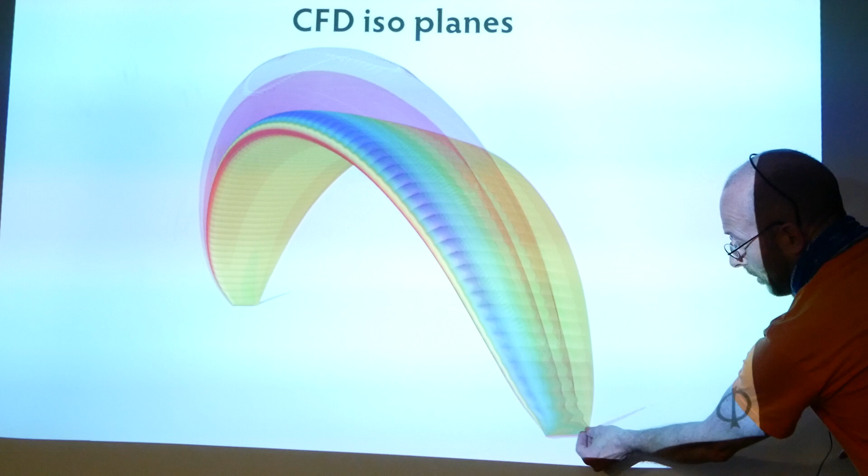So the vortex is finally creating a low pressure area. The low pressure is sucking on our wingtip, is braking our wingtip, which is lowering the performance. We always try to limit, to minimize this effect by having more.

Hi everyone, this is a bit of a different one. I've had the chance to record a talk by Hannes Papesh at our local club here in the UK about wing design. If you haven't heard of Hannes, you probably have heard of his work because he's been flying, designing and building paragliders since the beginning of paragliding really. He's been working at Nova for many years and was the main person responsible for the Mentor series, which you've probably seen some Nova Mentors around anywhere you fly. And recently he's also started his own company, Phi Paragliders. So some really interesting design concepts, an interesting design process, and talks about paraglider design, and especially in-depth paraglider design, are very few and far between. So I hope you enjoy it if you're a design geek like me.

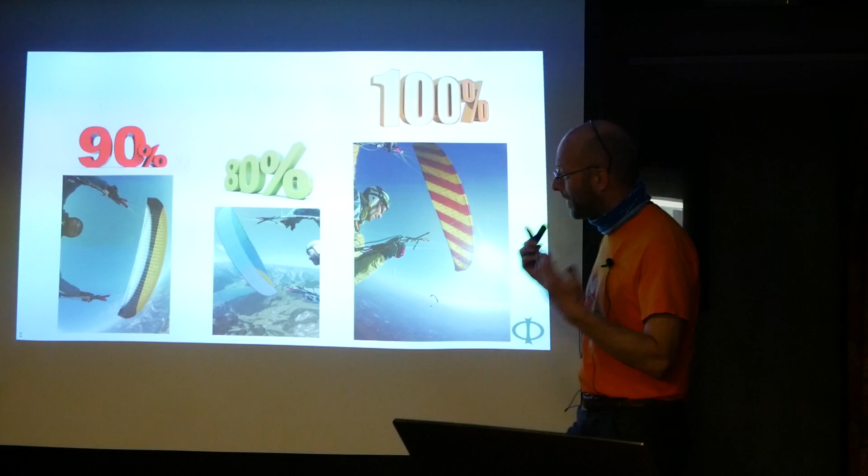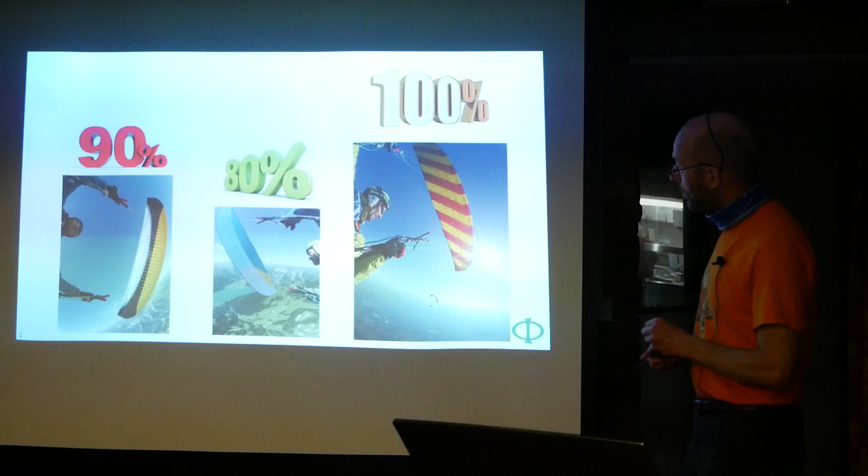And then I have the challenge to just combine the good point from this one with all the good points from that one to reach one glider which is good in all the matters, which is reaching 100% and which is ready to be certified and to be sold in serial. So these are real prototypes we had in the development of the Symphonia, our high-level A-class wing. And how do we do that?

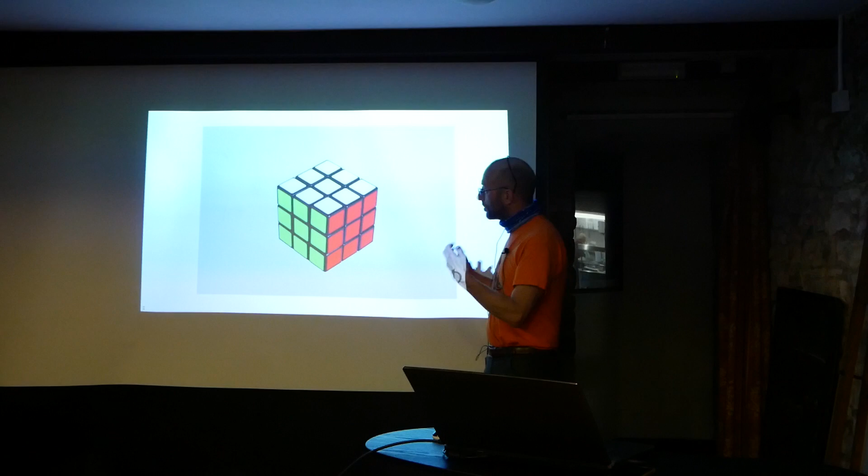Do you know that game? Yeah, I was presenting this Rubik's cube to our dealers meeting in the early days just to demonstrate the difficulties we have in paraglider design. Sometimes you're just finishing the red part and the green part is getting puzzled. So the important thing is just to finish all the aspects of a wing, which is very, very tricky.

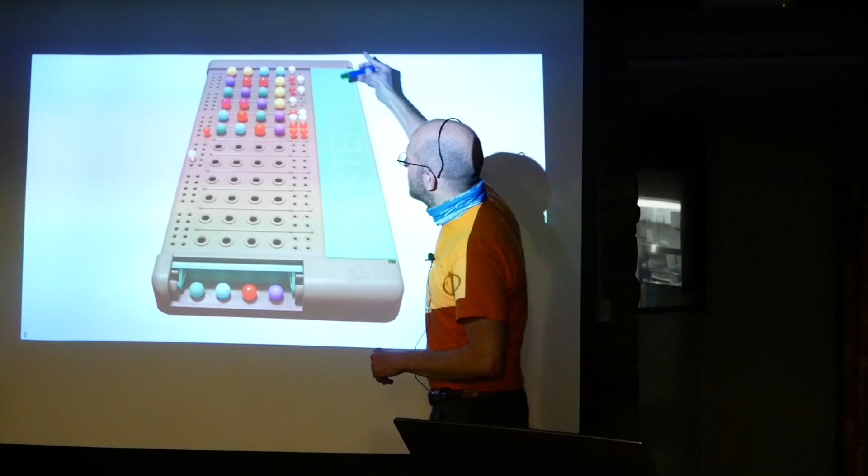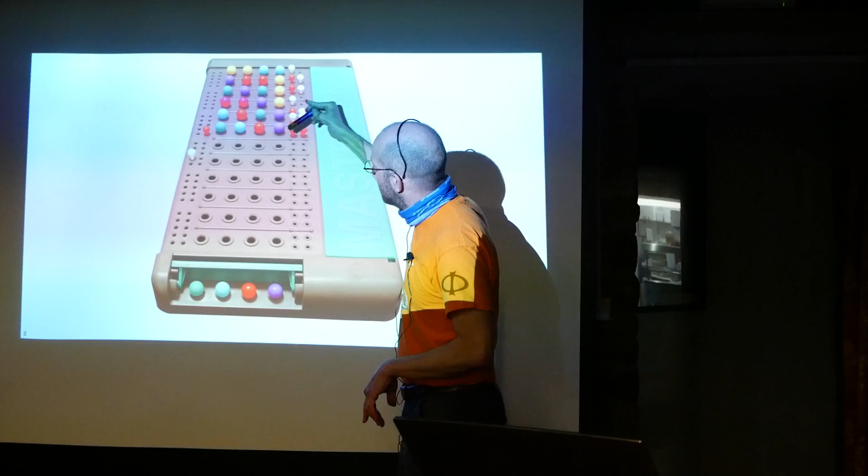Do you know this game? Yeah, it was quite a trend in the 80s. When you're the one on this side of the table, you have to guess the color code, and that one is just giving the color code and is giving the answers, if it has the colors in the right position or the right colors in a different position.

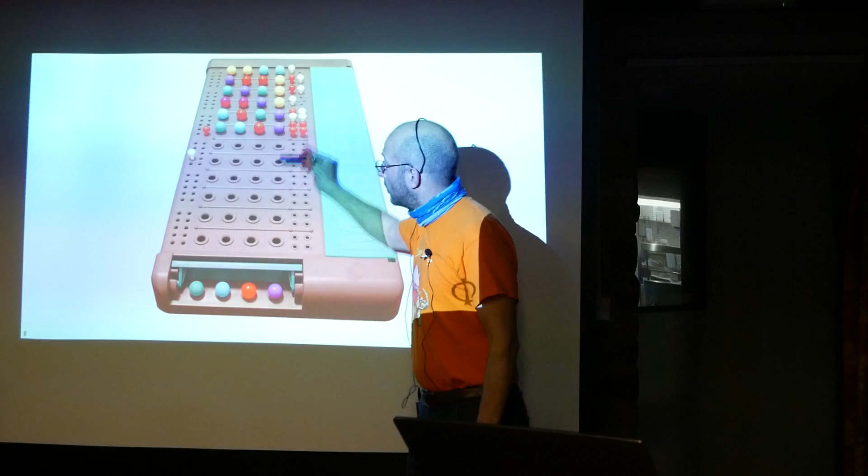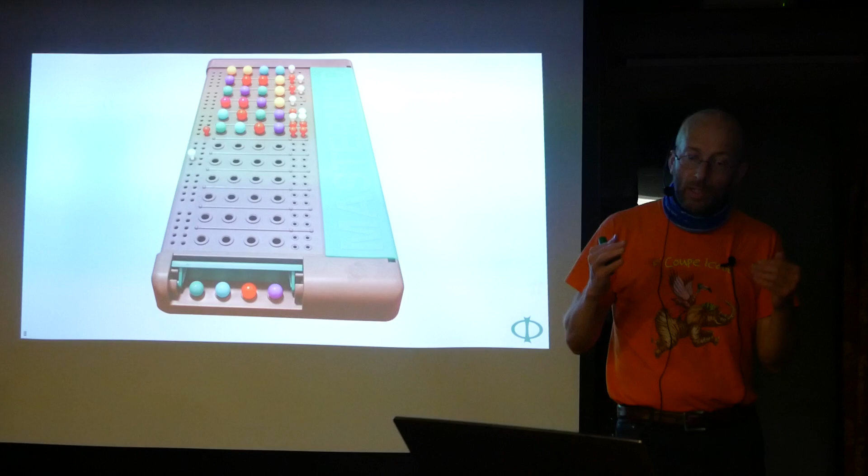And if you're really acting systematically, you will always get the right code among these tries. You will never fail. You just have to keep on acting on the base of a very clear strategy. So the strategy is the very, very important point in development. Sometimes, especially the last steps are the most difficult ones.

But I had the experience with my junior designers, like Alex, who is designing for Skywalk now, or the Advance guys, or Philip designing for Nova, that they have some problems doing the last step, the final changes for the certification and the final steps that are necessary to have the glider perfect and to have it finished and certified. Some of those had the tendency to jump over the fence and run an extra round. It's a matter of mental strength to be able to finish something.

Remember tennis, like Roger Federer, he's used to win. He won more than 100 big tournaments already, and you see now he's still winning, even if his competitors are much younger, maybe playing much more physical tennis and have some more abilities, but they don't have this mental strength. So it's also a matter of experience and strength to do the right last steps.

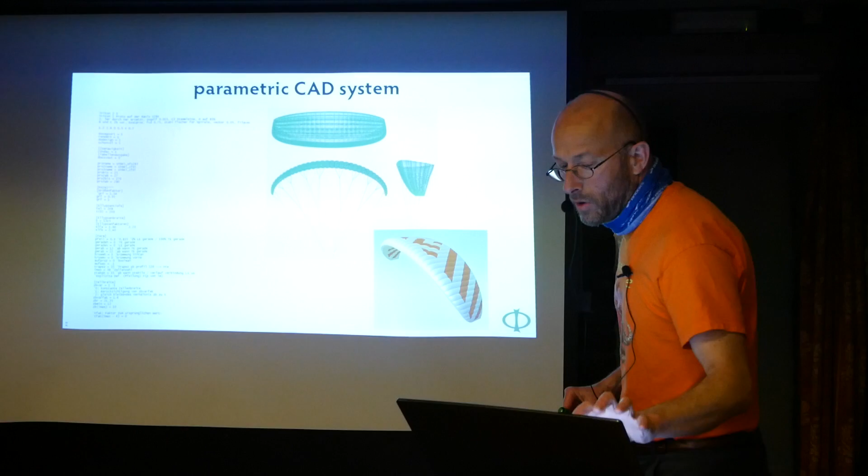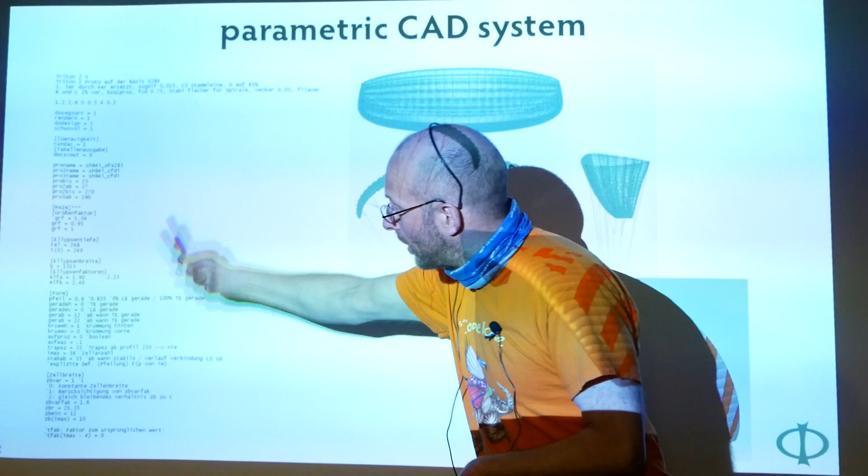Compared to biology, our development system is a parametric CAD system, computer-aided design system. That means every single entity of the glider is coded, defined by parameters. You don't do anything with the mouse, like on Glider Plan. Today I remember Glider Plan. I always forget the name of this Australian standard software. With Glider Plan you can do everything, but you have to do everything with the mouse, and when you do something with the mouse you do it every time different.

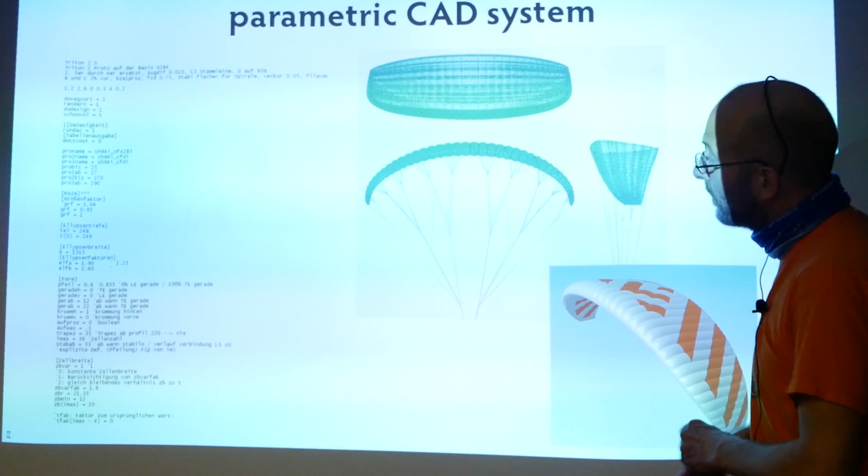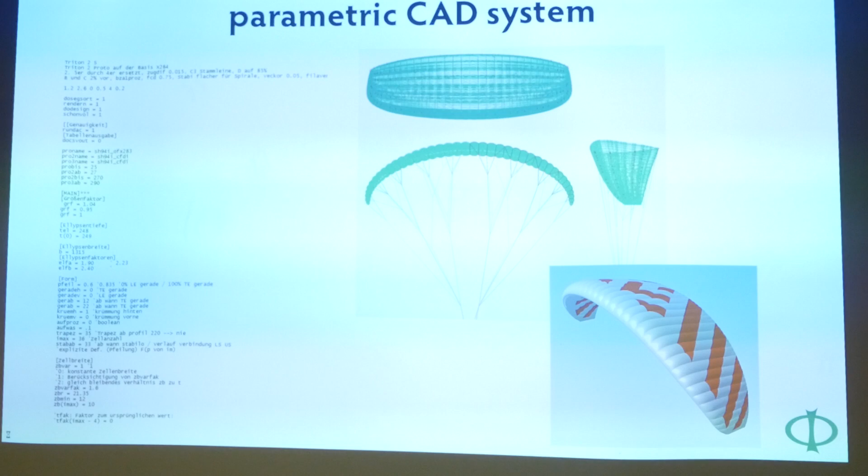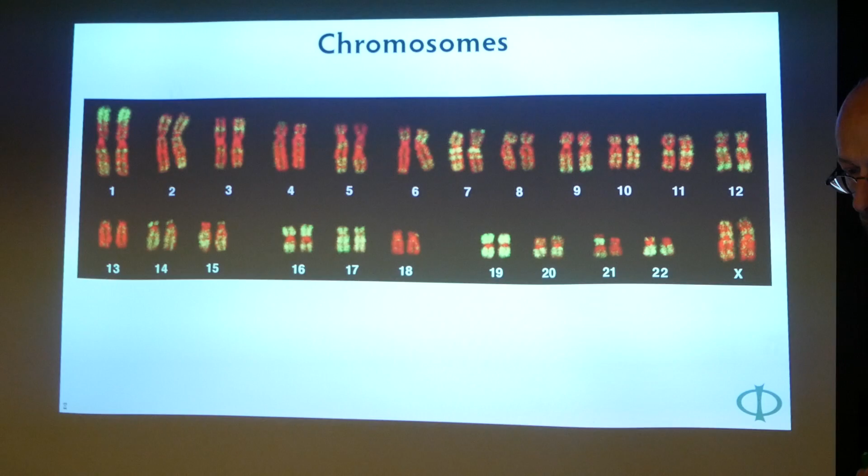When you have it coded in parameters, it's fixed and clear, so nothing with the mouse but some dry code, just parameters. Every single curve, shape, whatever is defined by a parameter, compared to our biological relation where everything is coded by the DNA and by reproduction of the single cell. The DNA, which is a long molecule, normally is folded together, is bundled together to chromosomes, and similar to that, we can bundle some technical features to just a group of parameters.

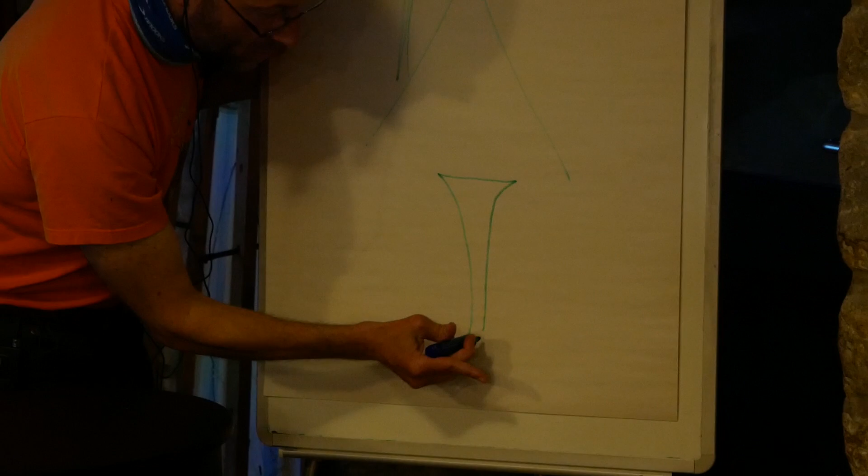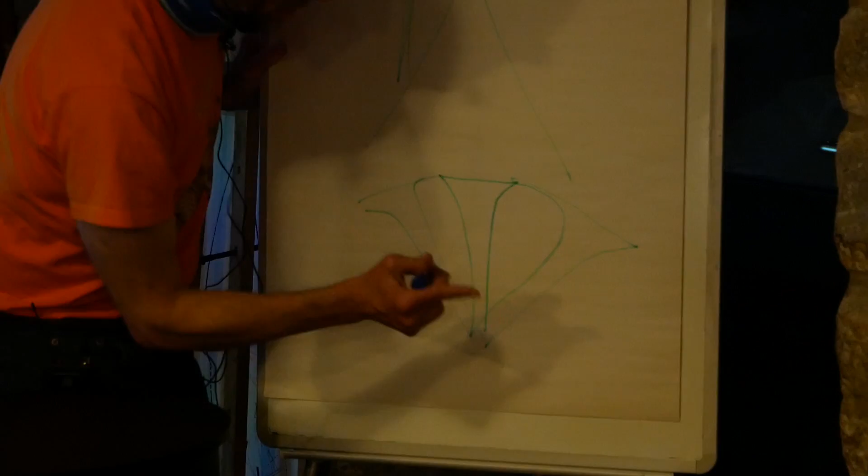Like this may be the code defining the new type of diagonals. You know, these fingers I was designing for the Omega XX in 2015 the first time. So they're shaped like that, like trumpets. And we just had a prototype, some development to optimize these parameters, to form these fingers. And then it shaped maybe a chromosome, and we can take this chromosome and apply it to the other prototype, and it will work among very few tries, maybe one or two prototype generations.

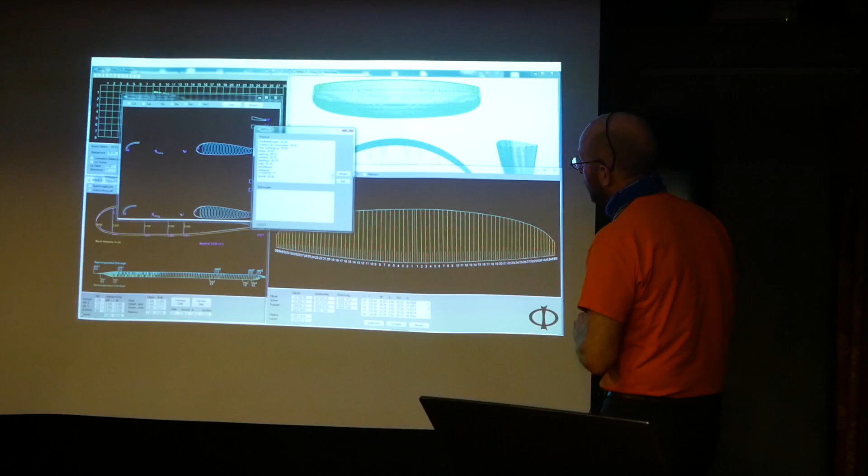So we are just recombining successful strategies. It's like a brick game. That was the base of our effective work. So we could certify 31 gliders in 1 year and 6 months, only because of this possibility to have these bricks recombined. Here we have a short overview of the single screens of the paraglider development system.

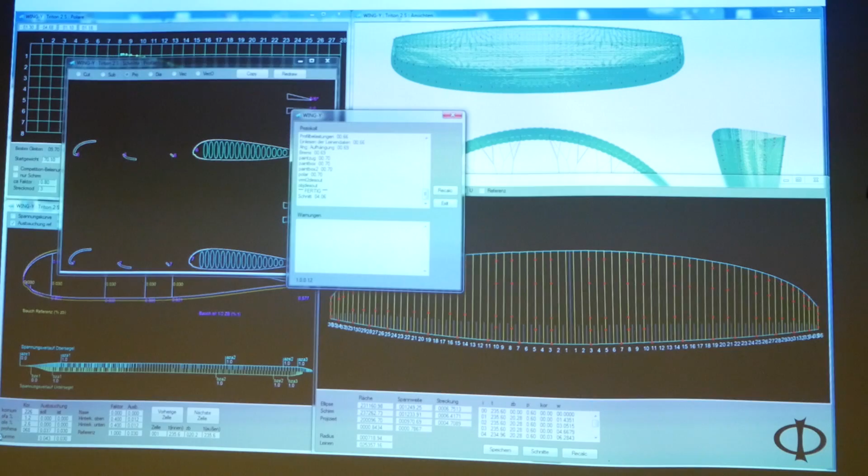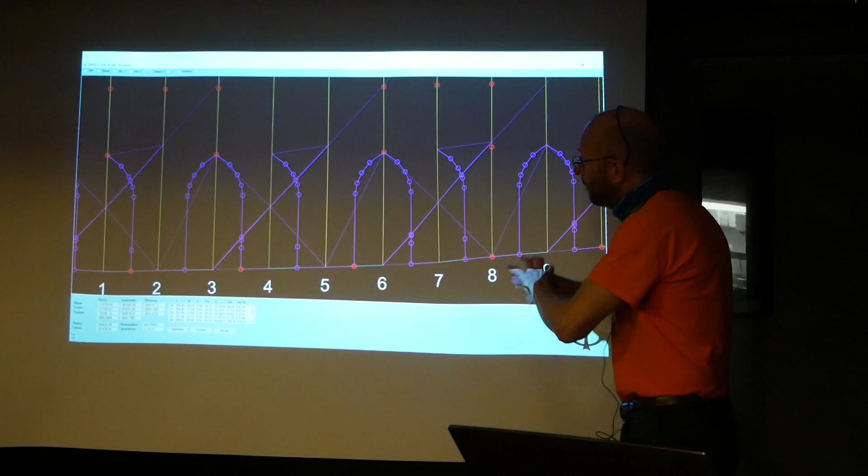We have here the ground shape, we have the views, we have the log file, the patterns, the ballooning transitions. We have a very simple performance prediction, just a simple one. We're getting more into the detail. These are just the sail cuts describing the design and having the inside mini ribs on the trailing edge with all the technical data. Here's some more details of the sail cuts. I was myself developing this software since 1988. So the first was just a sail cut calculation, but now it's a very complex workflow.

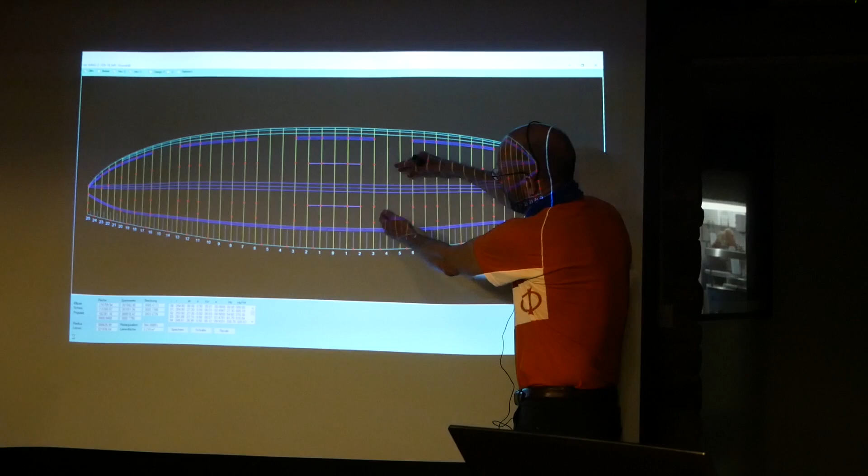These are the straps, for instance. You see the intake and the straps. Here you're playing around with different suspension positions, and you need the straps to keep the areas between the suspension positions stable until a certain amount, but then it should be a weak point.

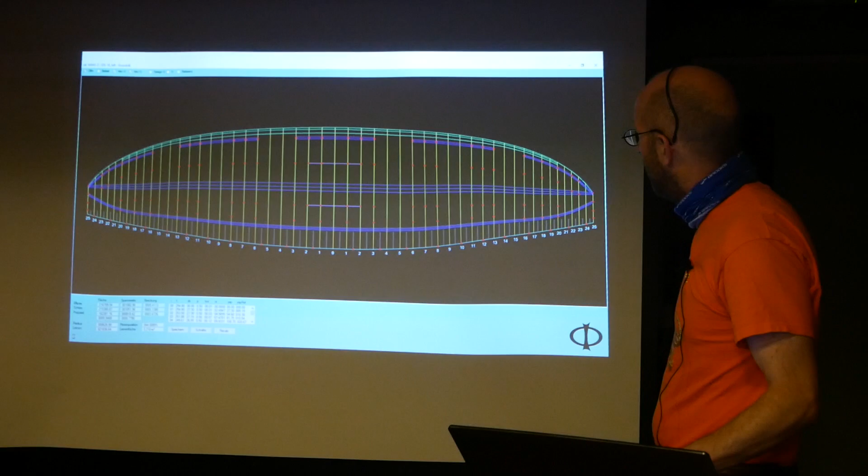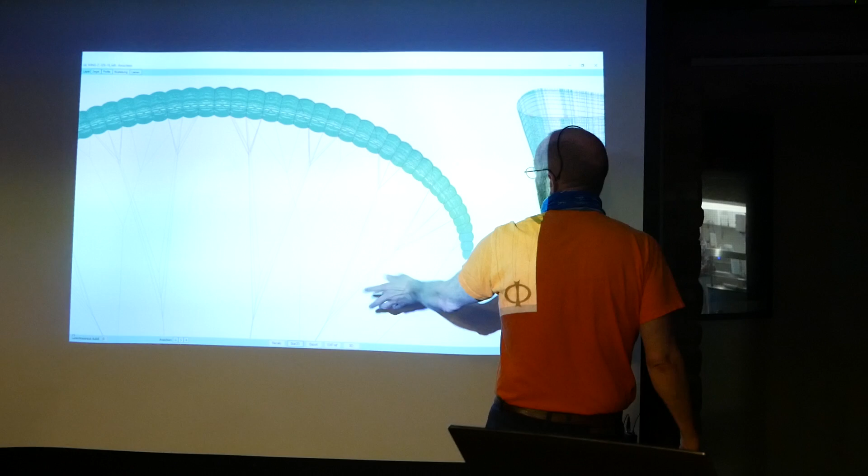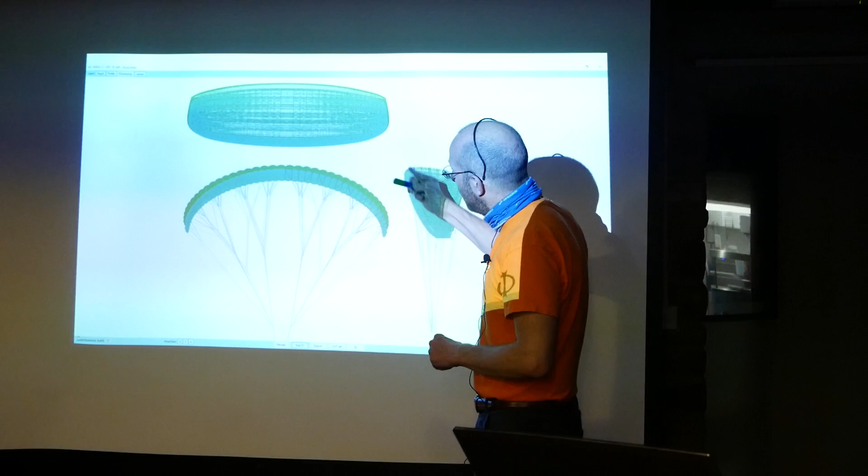Here you see the ballooning of the single cells, you see the diagonals, the angles of the lines, and at this stage there is also a simple analysis implemented, which is calculating the forces and which is giving you some infos about the line lengths and the diagonal angles. But the much more complex analysis will follow later. Most of the time you have a reference wing, here the green one. You can compare every single entity between the new draft and the older reference.

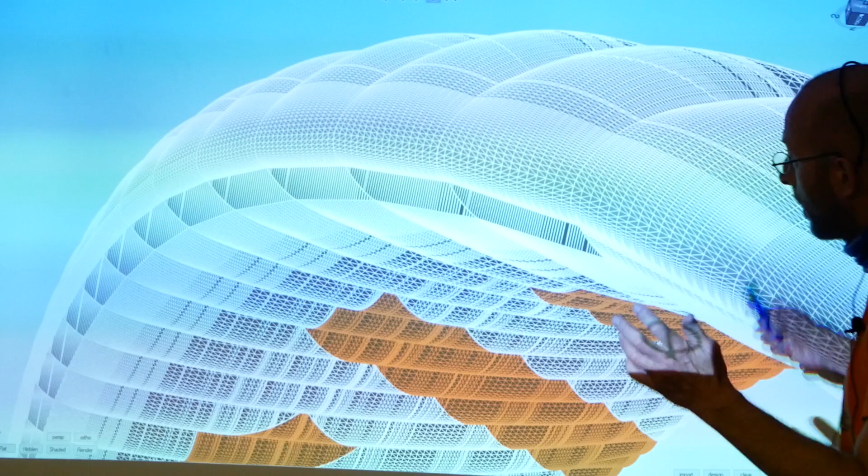And of course you get the nice 3D renderings in different types. Now we come more to the point of analysis. I was internally deciding to split one paraglider cell into 16 single segments, and I have 120, 150 coordinates in profile length, which in combination is creating a very dense surface mesh. And this surface mesh is the base of a simulation mesh.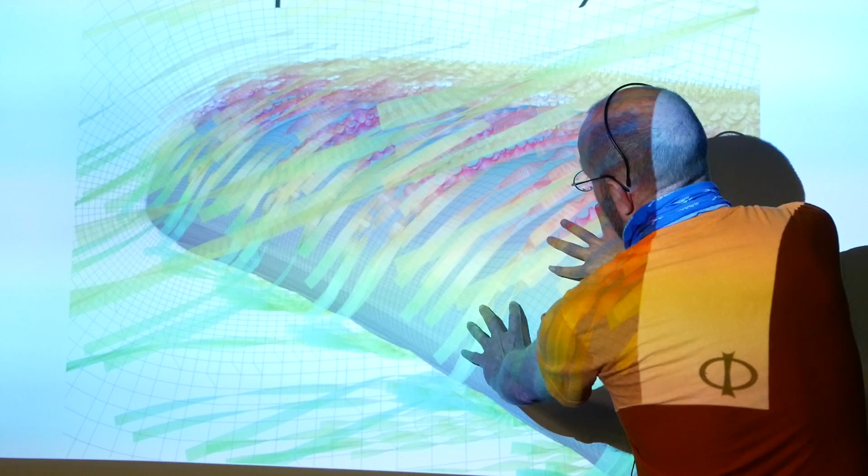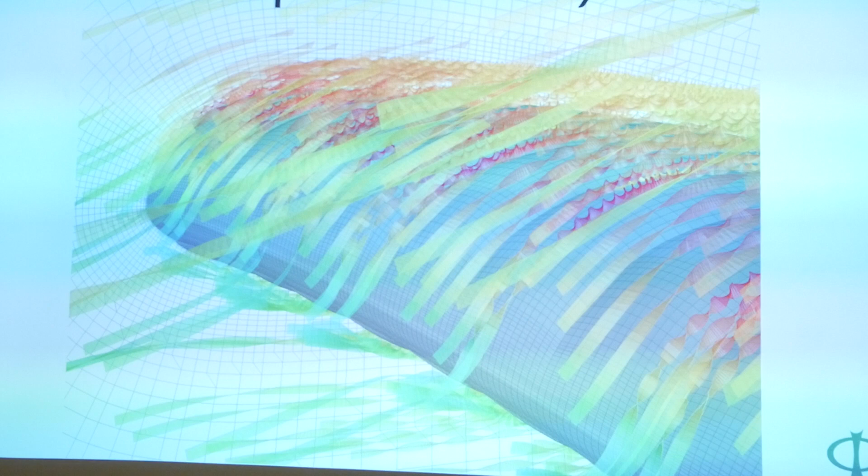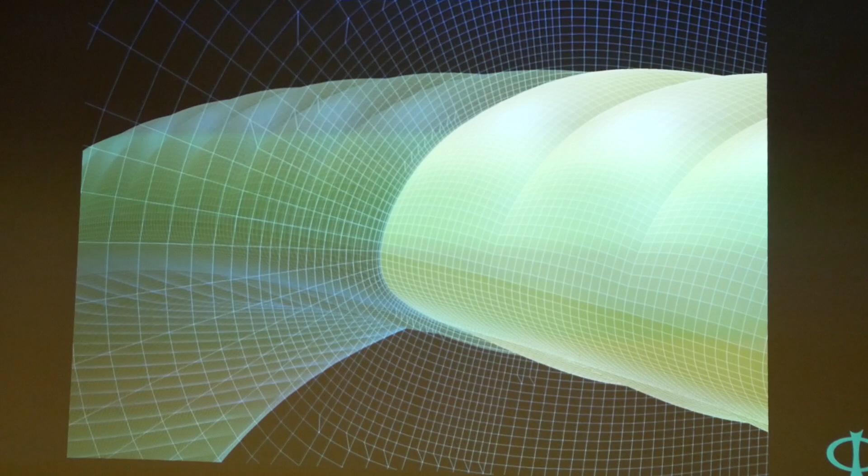Here another picture of the simulation room. So the whole room around the wing is filled with elements. It's called finite volume method. And you can do some nice visualizations. Like here you have the intake. We are simulating inside and outside the wing. That means we can get exact results regarding the pressure inside the wing.

Here you see, for instance, the stagnation point. It's still before the intake. It's depending on the angle of attack, on the more lower side, but still very close to the leading edge. The color is describing the speed. You see here in the area of the stagnation point, the speed is very low, and above the wing the speed is increasing a lot, about 50%, so over 150%, and the higher speed is creating a lower pressure, which is letting us fly.

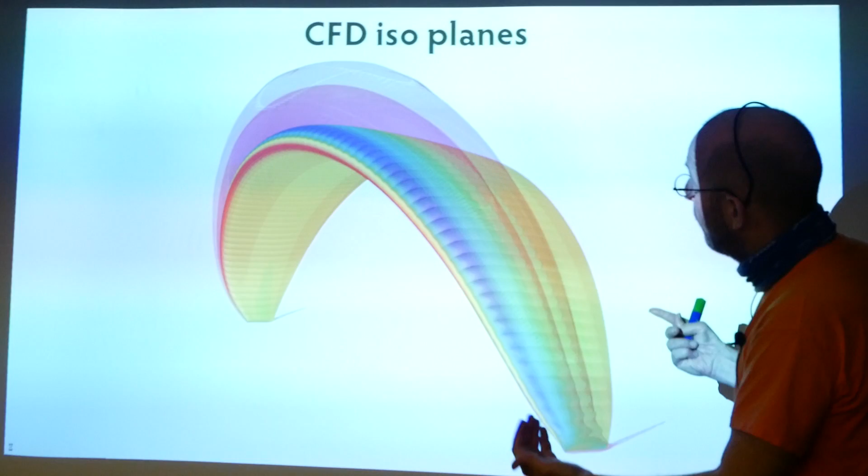Here you have the visualization of the vortex on the wingtips. You have experienced those when you ever crossed the flying path of a bi-place glider, for instance. You feel the energy. The air is just rotated. The lower pressure area, so the higher speed is creating lower pressure. And this lower pressure, we can visualize it like a bubble. So the lower pressure is a bubble sitting on top of our wing, and it's producing the force which is lifting us, or which is keeping us in the air.

I'm sorry? It's a fly bubble. Yeah, it's a fly bubble, yeah. And now we have, I think, talk number 7, and now you just had this idea, so it lasted a while.

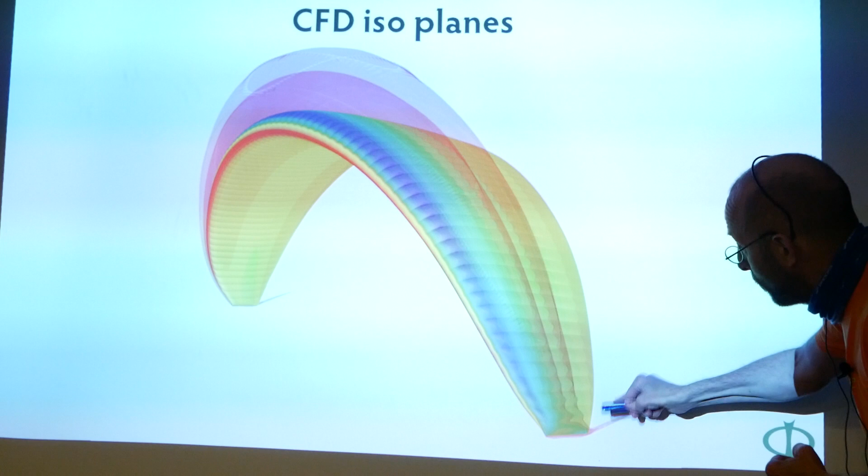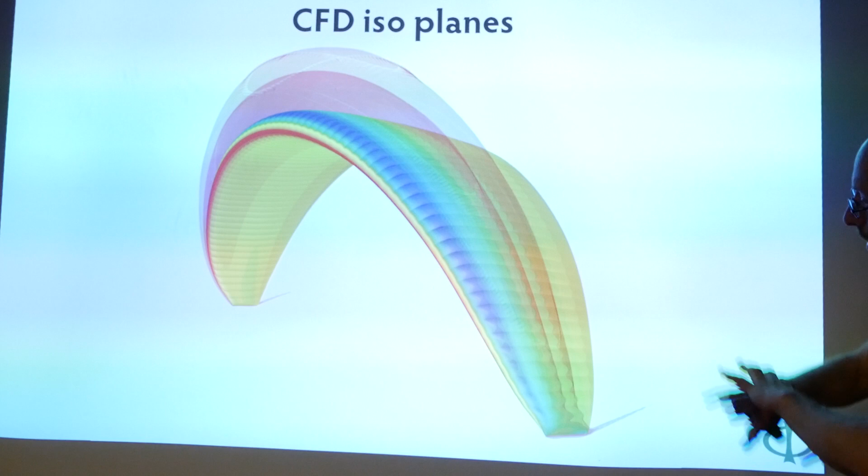Okay, here we have the fly bubble, and here we have the brake bubble. This is the lower pressure created by the vortex in the wingtips. So the vortex is finally creating a low pressure area. The low pressure is sucking on our wingtip, is braking our wingtip, which is lowering the performance. We always try to minimize this effect by having more aspect ratio, or a clean shape and the right lift distribution. But I think it's a nice visualization, not only the vortex you see, but also the effect it finally has.

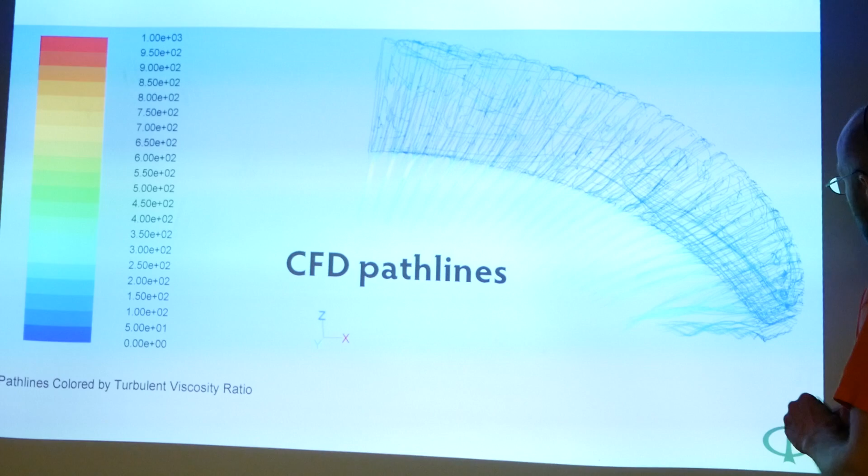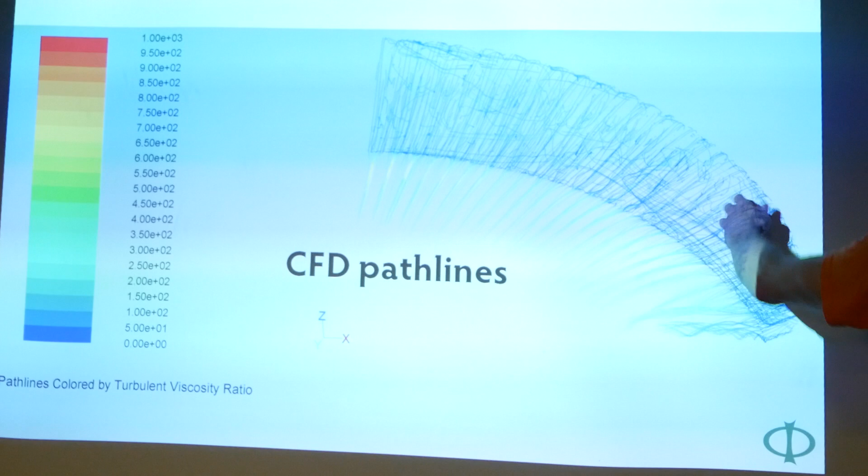Then here, interesting, we could have a look at the tracks the single air elements are taking. So here you see still the vortexes and some turbulences from the topsail, but you also see inside the wing how the air is flowing. It's flowing with a very low speed, which is good. You want to avoid having air getting into the wing in the center and streaming out of the wing in the wingtips, which may happen when the intake is not properly designed.

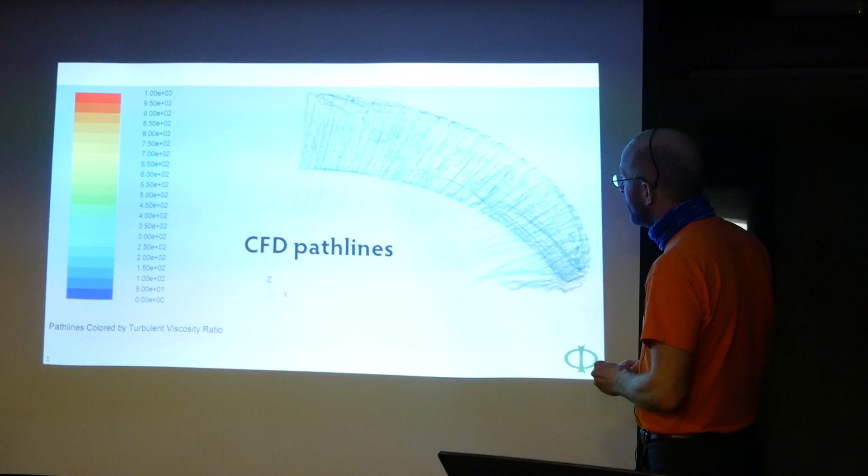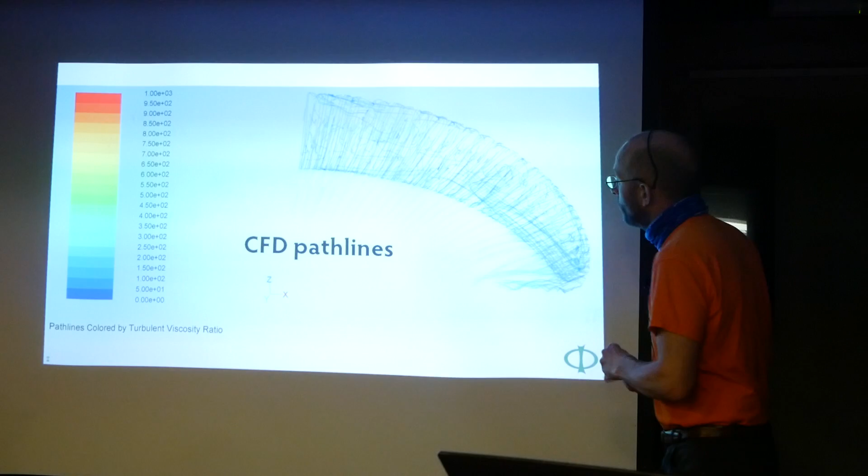So the shaping of the intake was always an issue. We do this since 2001. So shapes like the shark nose marketing thing, they were already known to us, of course, and we were playing around a lot with this pressure behavior. If the pressure is not rightly distributed between center and wingtips, you may have this inside stream flowing to the outside. But here we see the speed of the air particles is very low, and there is no clear outstream. It's good.

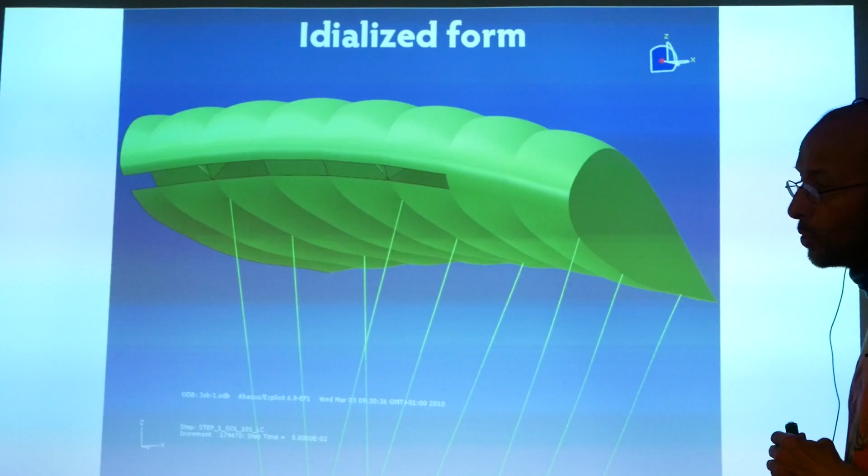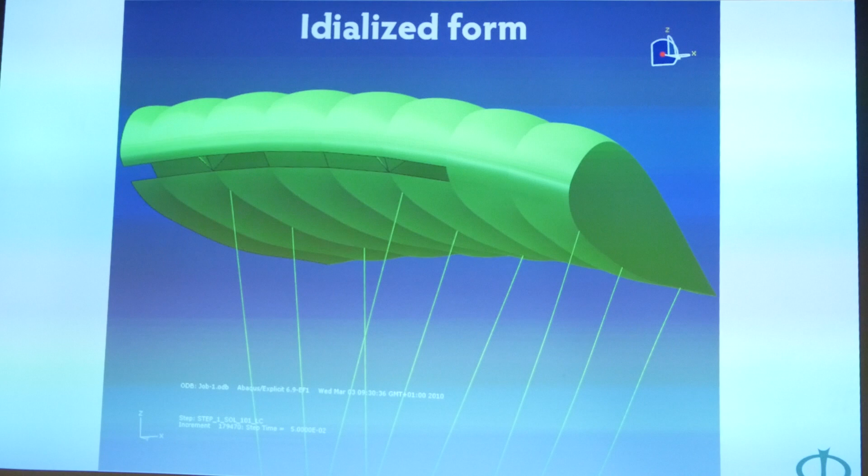Next big step. It was almost 10 years ago, as we managed to do the following. Here you see the usual paraglider visualization. It looks too clean to be true. You see the ballooning, you see the clean shape. It looks like an object of aluminium, but we managed to have the computer simulating the deforming. That looks much more real.

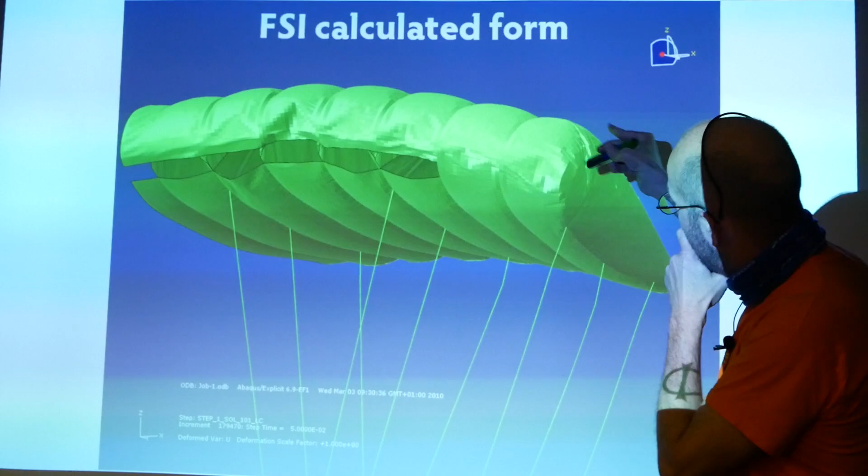So we see the wrinkle on the line here on the stabilo. It looks real. You see the deformed leading edge. You see this construction of the diagonals. Remember, the classical one is not working. It's losing the wingspan. The line fork is too short. So the whole thing is showing a massive deformation. Computer calculated, 2010. The technique is called FSI, Fluid Structure Interaction. So that means we have the forces from the airstream calculation.

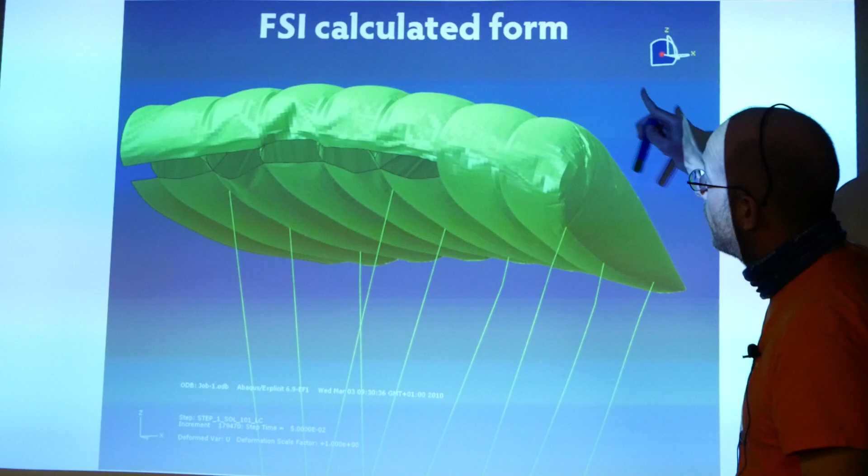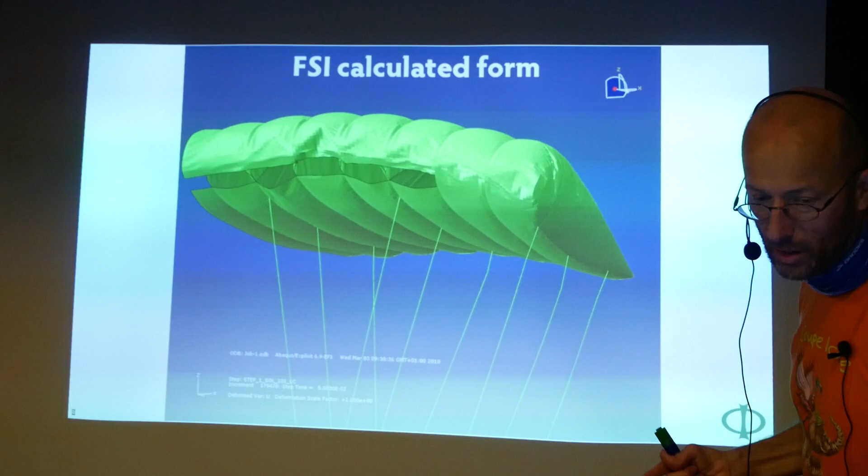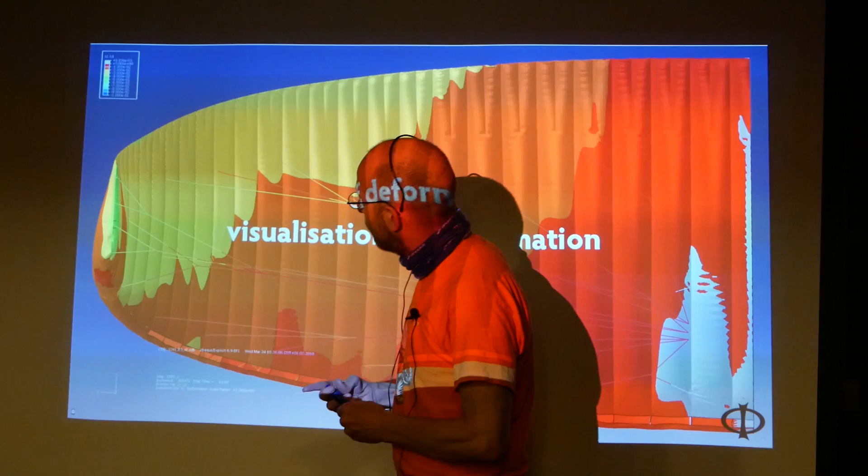The color is coding the wingspan loss. So this means 1 centimeter, 2, 3 centimeters. As more color, as more deformation. Here you see you have some problems in the stabilo. Most of the gliders have problems in the wingtips because some designers have less cells in the wingtip, so they keep the cell width almost the same while the chord length is shrinking massively. That means the relationship between cell width and chord length is getting not as good as it should, so you have some massive deformations in the wingtips.

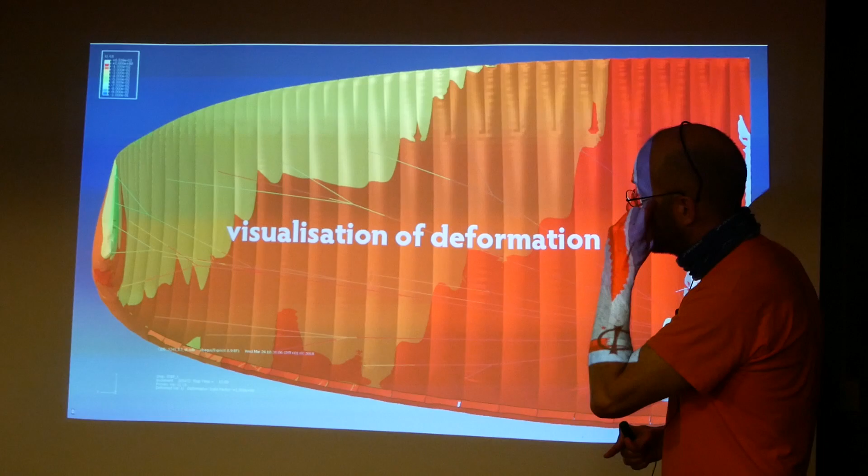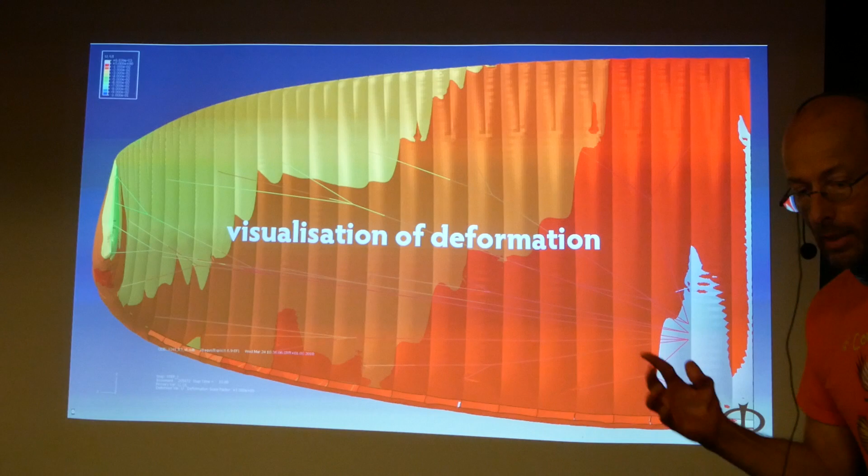In real flight you may recognize less performance and worse handling, but we can exclude it in the draft already, in the computer analyzed draft. So if the computer is telling us that it's deforming, we don't build the prototype. So we spend more time in computer analysis, in trying lots of different drafts to have finally the computer telling us that it's a reasonable good version, and then we realize it.

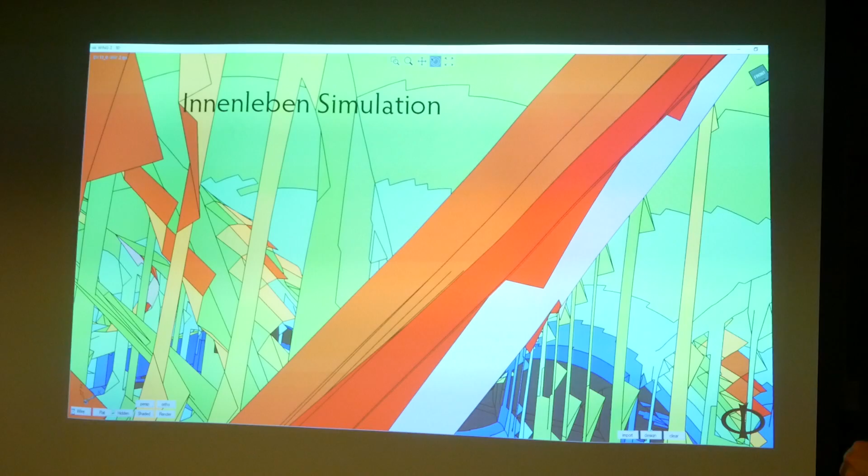So when the computer is telling you that it will not work, that it shows too much deformation, it's senseless to build a prototype. So the computer prediction is already so good that when the computer predicts a problem, there is a problem. And when the computer gives the go, then we are building the prototype.

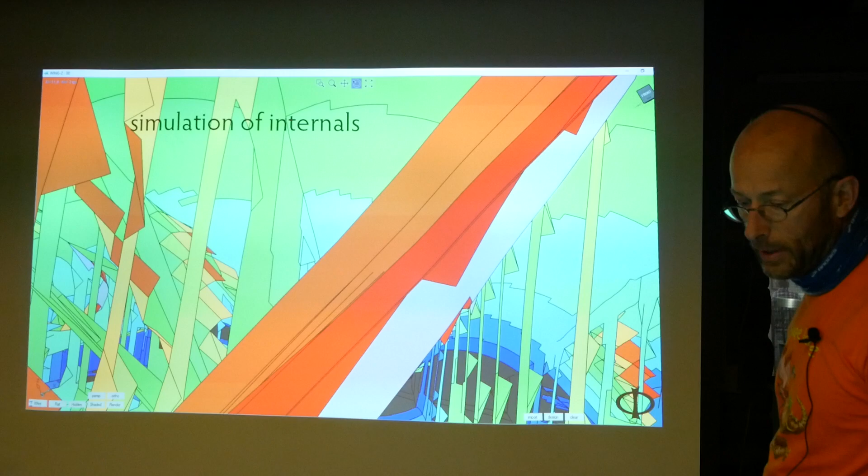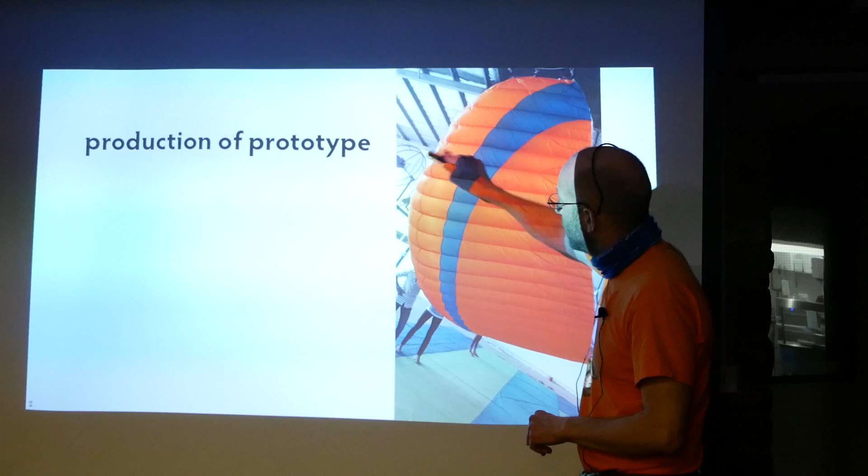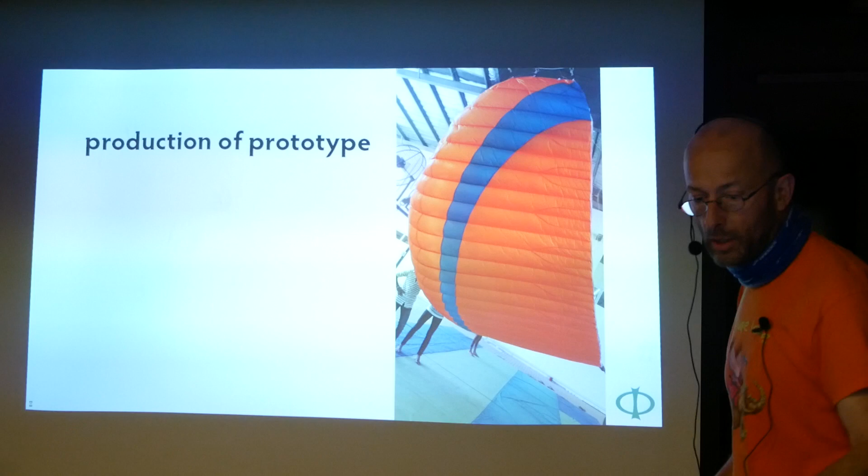The first pictures you get from the proto is that one. The factory is checking the sewing, so they are mounting the glider upside down and having some ventilators inflating the wing to check the sewing of the internals. So this is the first glimpse you get of the blown up proto, but without having the real loads on it. But quite soon you have the first flights.

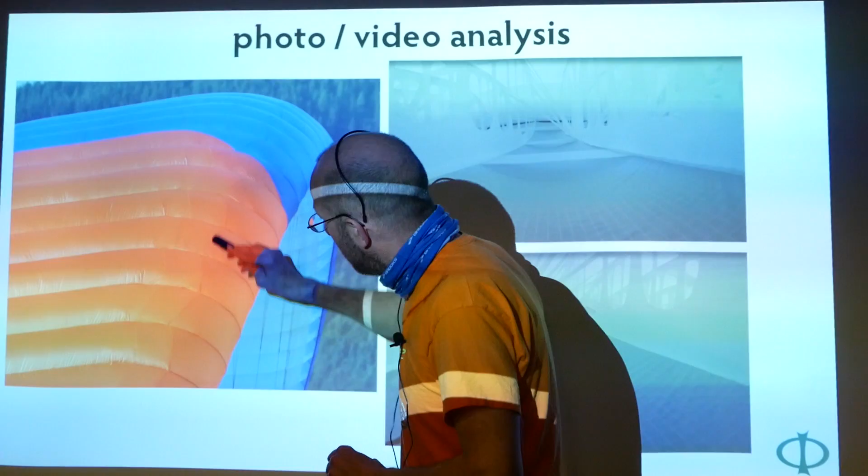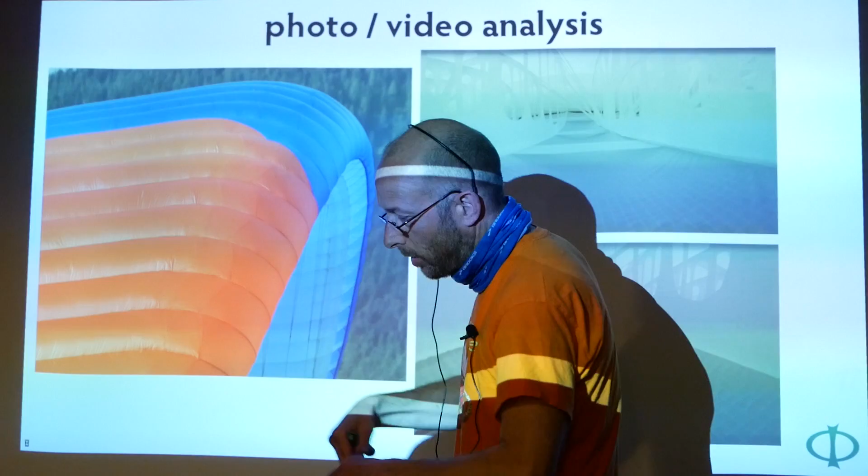So this is normally my job, to shoot these air-to-air pictures, where we can evaluate how the 3D shaping is working, if it has the right dimensions. It doesn't have to have curves here, or what's the name, scratches? Yeah, or it's like this. It could be bad if it looks like that, you know, all over the wingspan. This kind is quite often seen on the 3D shaping, because of the shrinking of the sewing, you have a deformation here.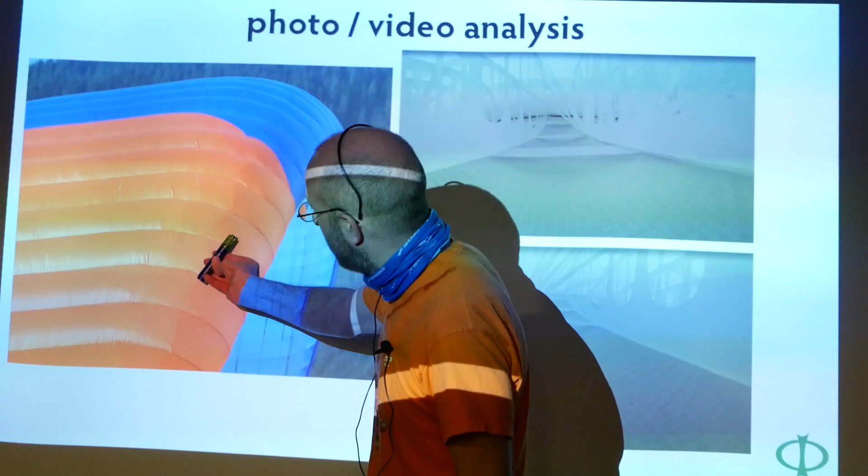That was the reason why I put the 3D shaping in diagonal shape, because there is more force in this direction, which is stretching finally the sewing, and it has to be properly designed in the matter of having some rest tension to tension the cloth.

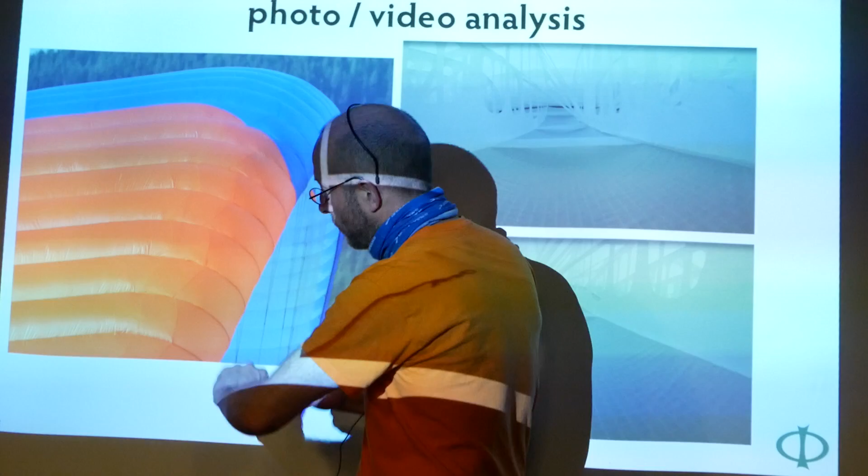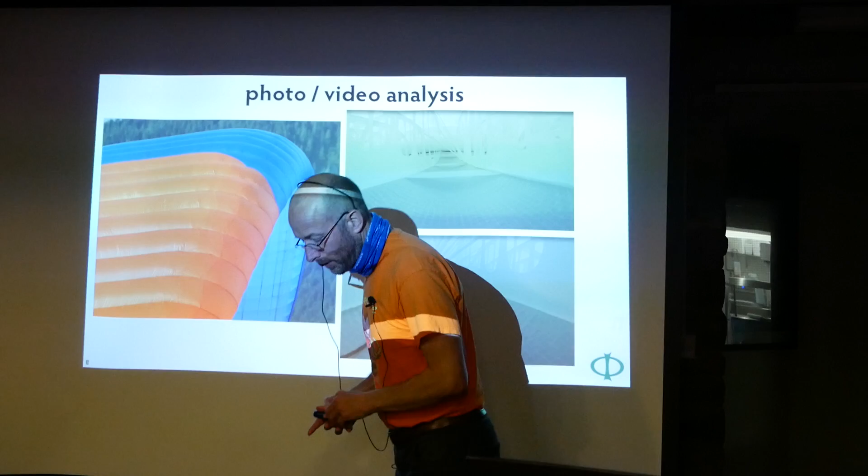We have finally the same problem as the cartographers: we have a round earth, and they have to map the round earth to a flat piece of card, like that one, and we have a flat piece of cloth and have to form a round shape of wing from it. But we have the advantage that the cloth is more stretchable than paper. We use the same techniques as the shoemakers. We can bend the material over the round shape to a special degree, not too much. And so we need some forces to bend the material.

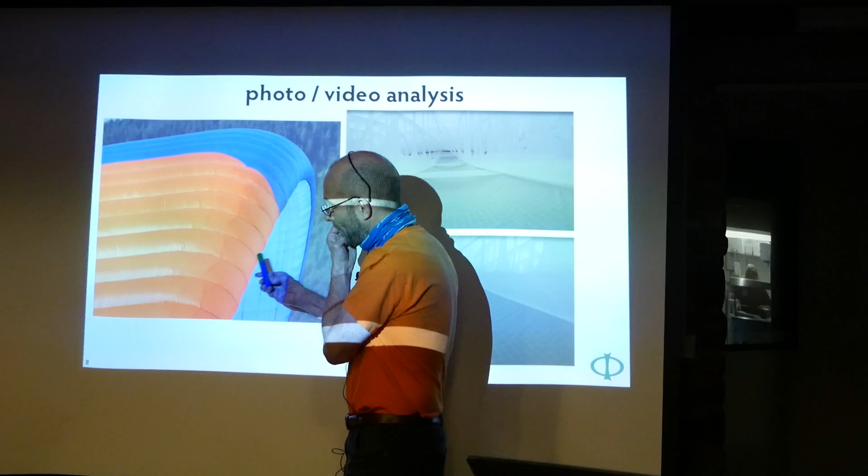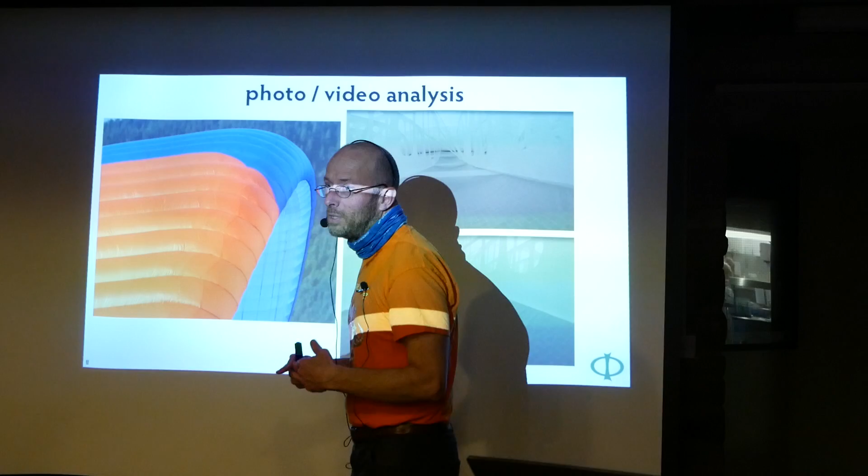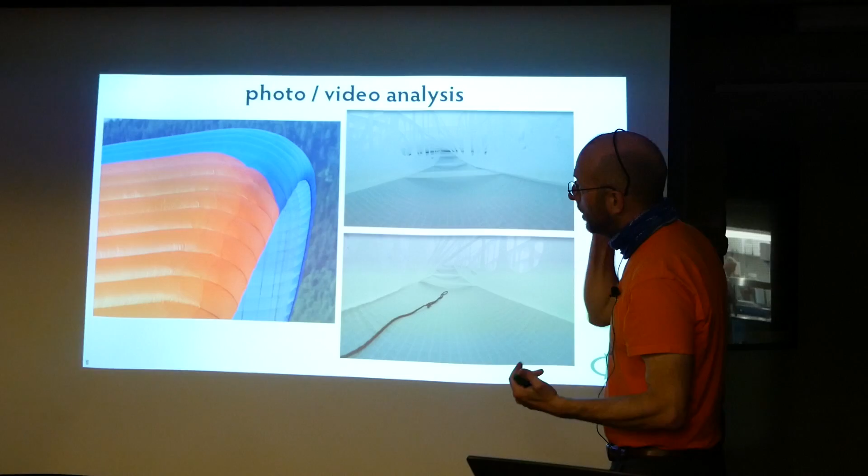So there is also a parameter describing how much cloth is added inside this 3D shaping sewing. And we have the experience that these optimized parameters can be applied to nearly all models. So we just had to optimize it once, and then we took this chromosome, this parameter, and applied it to many others, and it was working from the beginning. So it's just like a brick game. That's one of the reasons for our effective working and our fast results.

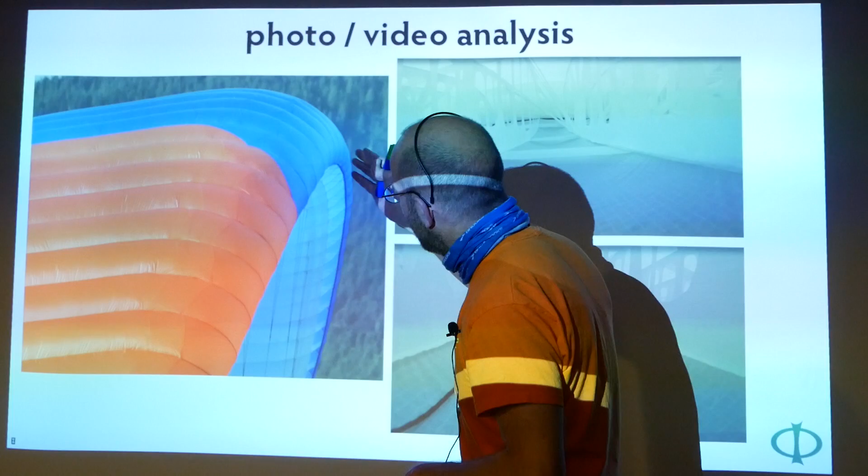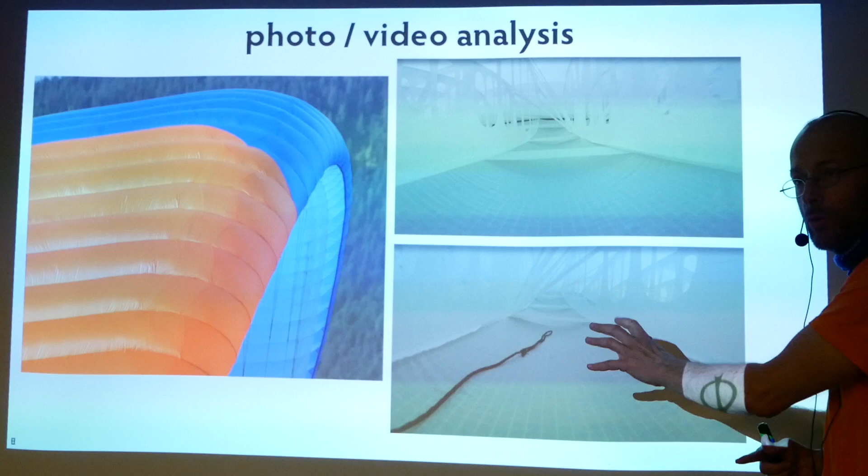And here you see how the leading edge really should look like. This was the Symphonia proto at that time. And another important step is the GoPro camera recording. I showed you the GoPro recording of the single skin. Normally the inside recording looks like that. It's inside, so bottom sail, no landscape.

And an important point to look at is if the straps are really stretched. If we have dimensioned too small values for the bottom, for the ballooning, we will lose wingspan. We've seen the graphics before, and when we are losing the wingspan, then the straps will be loose. When the straps are stretched, when they are under tension, then the glider has the wingspan it should have. In the case it doesn't have the wingspan it should have, then everything changes. Then the lines are wrong, the angles of attack are wrong, everything is wrong.

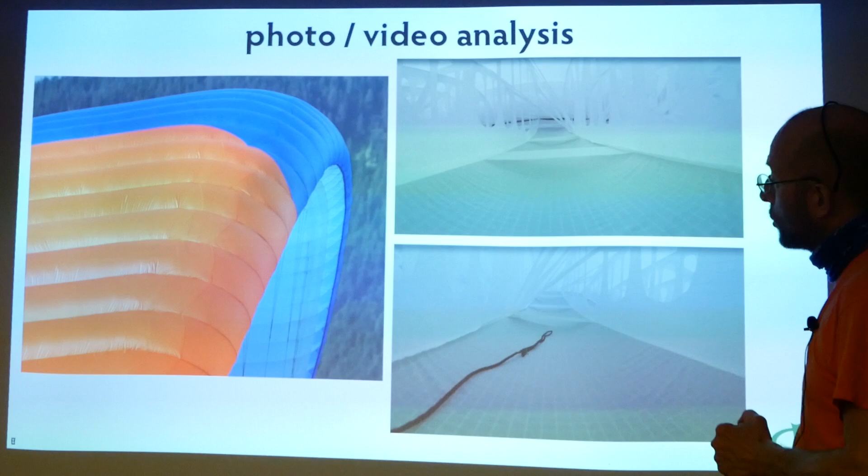And you sometimes see some protos, not of ours, where they did some sewings on the leading or the trailing edge to get it under tension, but then all the rest is crap. So it has to be designed properly, and you have to reach a model which doesn't show deformation. If there's deformation, all the rest of calculations are useless.

Here you also see the diagonal ribs, these single fingers I was pointing here. And they are not only pointing to the next airfoil, they can even point to the second airfoil leading through the holes. So Nova was calling it needle eye ribs. It was a feature of my software as long as they were allowed to use it. So it is just this technique. And this, you see, it's a lot reduction inside, big holes, very thin straps.

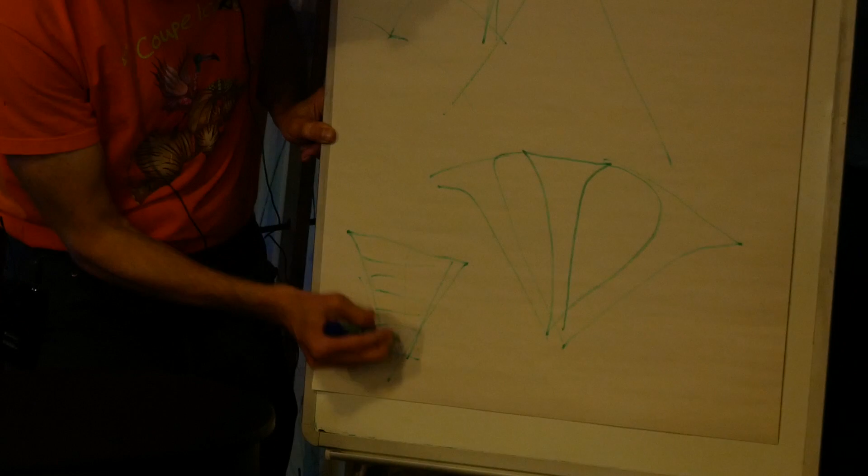The basic idea of this construction is that the classical diagonal rib is a trapeze. And here the load is diagonal to the weaving of the cloth, and so this is leading to a big amount of deformation. Or it means the whole load has to be carried by the coating, but as soon as the coating is overstretched once, it's gone. It will never recover.

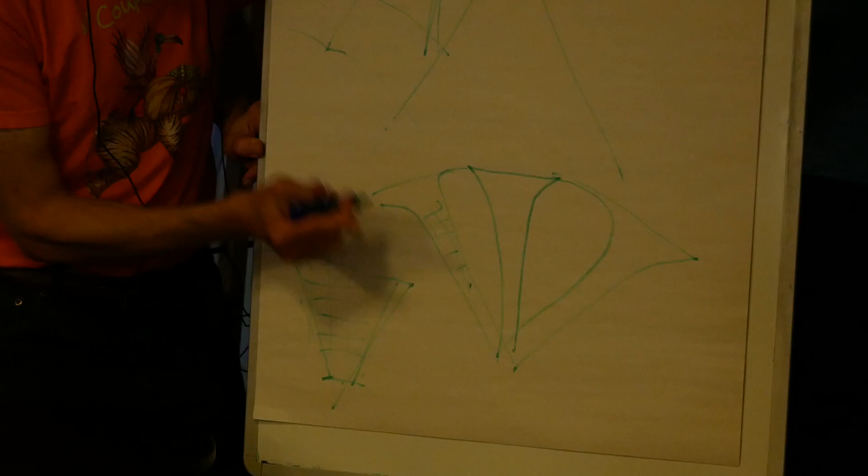And here the load is in the direction of the weaving because it is cut directly in the weaving direction and then mounted that way. So the deformation is not as big and it's like a spring, so it can recover. So it's a big advantage, and you can have smaller straps here, and you have less material and a better durability.

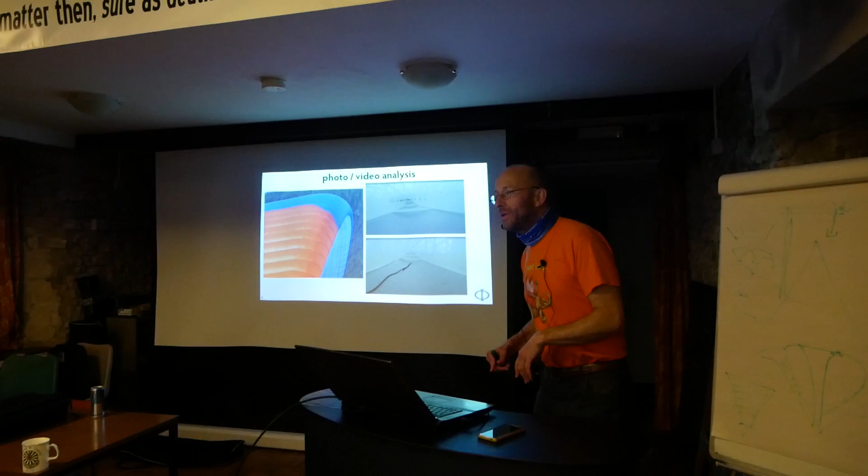It's all about strategy and discipline and evolution of human beings, of animals, of paragliders. Finally, after all, this is all marketing. Forget whatever I tell you. Don't trust the manufacturer. Pay attention. Don't trust any manufacturer. The louder the marketing is promising anything, don't trust it. Try it yourself. You are the parameter.

Some say that the dinosaurs went extinct. They didn't. They developed the birds, and they still rule the world.